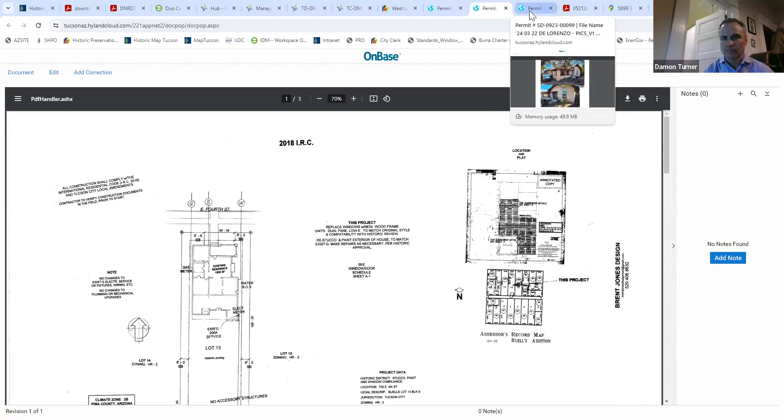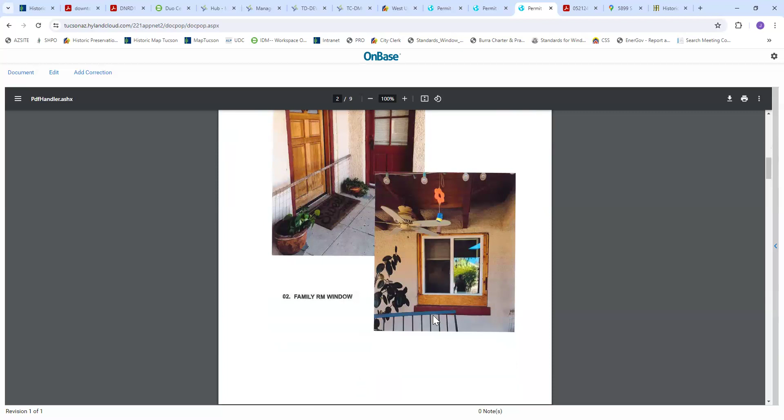Okay, very good. One of the first things I'd like to address is a question that came up regarding, so we're replacing all the windows on this historic residence with new units typical in keeping with modern windows. They have all the energy efficient benefits, the dual pane, pressurized gas, argon gas filled, everything like that. But in keeping with the historic requirements, we went with Pella Windows and Doors, they have a historic line. Now, they don't have specific window units that I could show you an example of, say the window for the kitchen or the window, because they all have to be custom built.

So there is a generic catalog listing for their historic window line, but nothing specific to this house. There wouldn't be anything like that until they make them, and they're not going to make them without a deposit. And the homeowner's not going to put a deposit to have windows made without the permit. So we're not going to have that, but what I can tell you about Pella's line...

It's wood exterior, unlike typical modern windows that are clad with aluminum or vinyl. They're wood windows, but exterior clad with aluminum or vinyl. Not so with the historic line. They are wood exterior, in keeping with what would have been there for the period.

A question that came up was whether the mullions, or muntins as they like to call them now, that separate the individual glass lights would actually be separating individual window glass, or whether they'd be only aesthetic. The answer, straight from Pella, is that they have a technology called ILT, Integral Light Technology. The window glass is not interrupted. This is in keeping with maximizing the energy efficiency for the units.

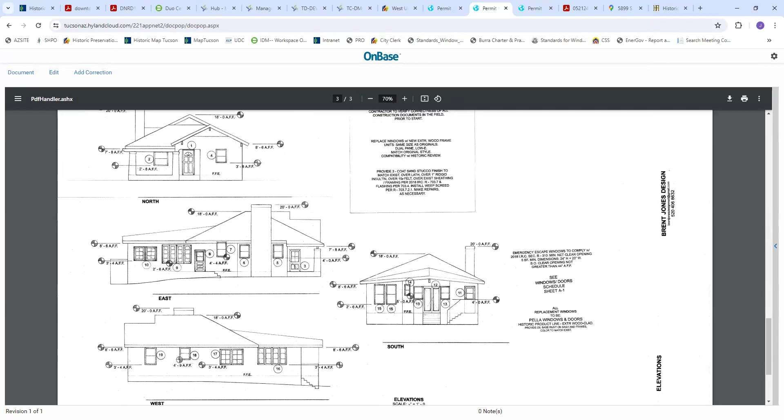Hey Jody, could you navigate to the elevation so we can see what he's talking about? I'm on the elevations, but hopefully you're not looking at a letter I'm typing. Huh, oh, nope, never mind. I had my participant panel up and it was hiding it. So I see them now. Thanks, never mind. Okay, I see what you're talking about now. Thank you, sorry, continue.

One thing I wanted to point out is when they put those mullions inside the glass, I believe it's called divided light panes, that's not what you want for the historic look. You want to mount it on the outside of the glass, so they will not be divided light panes. The aesthetic application of the mullions will be mounted on the outside so they can be painted.

They'll be painted with a paint that will match that brick red that's on the house now. It looks almost like a brick red to me, and that will be matched. You can see it on the trim on the roof, and if you look at the submittal photos, that red color is throughout the house. It's also on the pop-out sills. The house features these stucco pop-out sills under the windows, and they feature that brick red color.

One thing you can also see is on the entry door, in pictures, there are mullions. Those are in the same color as the unfinished wood on the door, but on the wall to the right of the entry door, there's a door that has the classic look I'd be describing. It's painted in that brick red, and the mullions separating the individual glass lights are painted in that brick red.

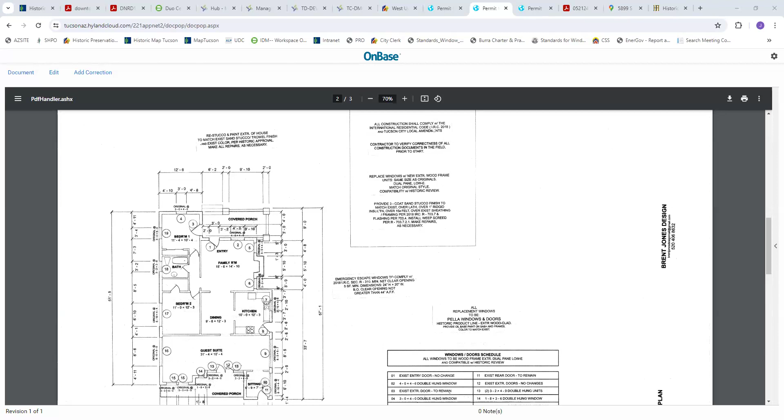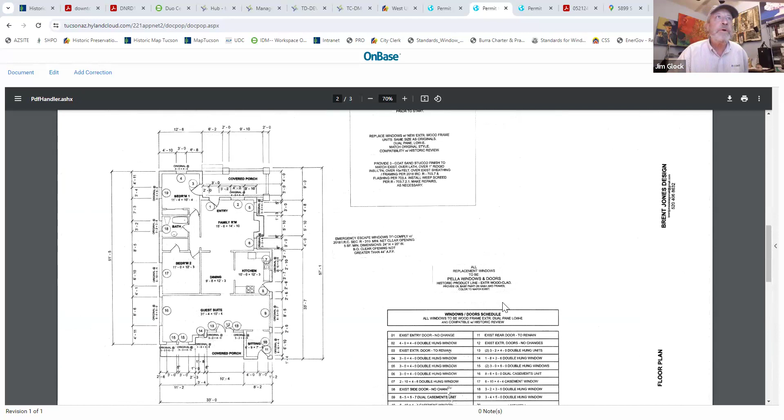Just one clarification before I open it up for questions. Brent, you noted that in the kitchen casement windows would be appropriate, yet the schedule shows double hung, and then the bedroom is where the casement window is. Is the bedroom turned into a kitchen? If you could flip back to the floor plan, please. Yep, I'm there. So 17 is the bedroom with the casement window in your schedule, and then 16 is the dual casement window that's in the guest suite.

So yes, I should probably clarify. I'm just asking you to clarify, I'm not saying that that's right or wrong. I just want to- and then in the kitchen it does still show a double hung, number 7. So I'll give you a chance to clarify casement versus double hung and their placement and the basis for that decision, please. Yep, you're right, I see that. Okay, so here is my explanation for that.

So for instance, number 17 is a very long window, you wouldn't do a double hung on a window like that. That's when I was thinking of bedrooms, I was thinking of from the front. I said it without actually looking, but what I had in mind when I said a typical window for the bedroom would have been, say, window number 4 or window number 19. Window number 4, you can see it on the front of the house, that's a typical double hung window. You wouldn't want to do a casement, wouldn't look right for that.

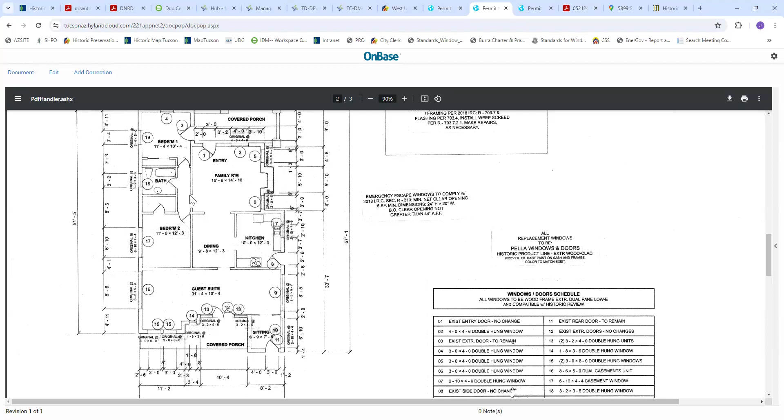But for instance, as you brought up, number 17, yes, you're right, that is a bedroom, and I didn't have that in mind when I said that. But yes, because that window is long, you wouldn't do a double hung on that. I mean it just wouldn't be period accurate, not only for historic, but it's pretty much unheard of. That naturally wants to be a casement unit.

When I said the kitchen, I was actually thinking of the long windows to the back of the house, windows 9 and 10. The kitchen window, it turns out, is a double hung, simply because of the size of it. Again, making that a casement would seem period incorrect. Windows that have that typical size, like number 7, number 4, number 19, from everything I see from neighboring houses and what seems period correct, those are double hung.

But these windows that are unusually long, like they're 8'5" or 6'10", these long windows, they tend to feature in rows that are lined up. And those, if they're going to be operable - not necessarily all the time on the original historic window would those be operable - but in order to satisfy modern codes with emergency egress necessities, you really want those to operate. But if they're going to be period correct, you want those to be casement style for those longish windows.

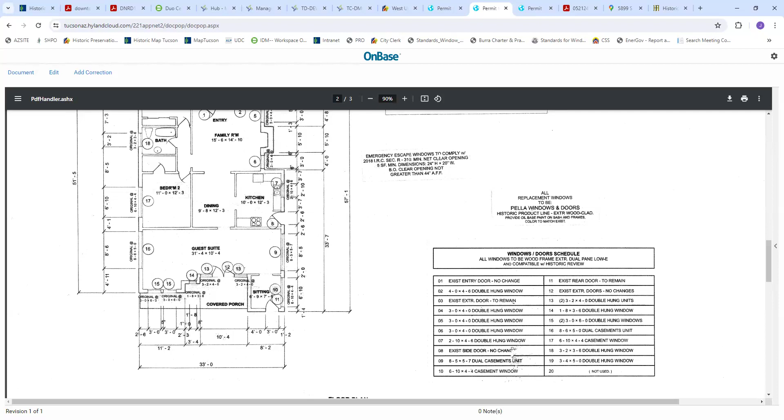So I did misspeak a little bit on the kitchen. Obviously you caught me on that one, and good catch, but yeah. I'm not trying to catch you, I'm just trying to be clarified here, and I'll let others perhaps catch another comment I have. But with that, I'm going to open it up to the remainder of the board to offer their insights, please.

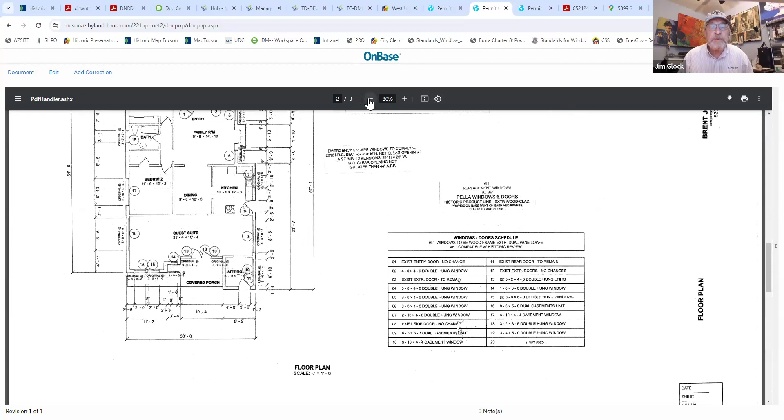Sorry, I got temporarily cut off for a second, but I did have a question actually unrelated to the windows. Can you guys hear me? Okay, yep. I saw a note in here about rigid insulation. Is that exterior or are you doing some interior insulation?

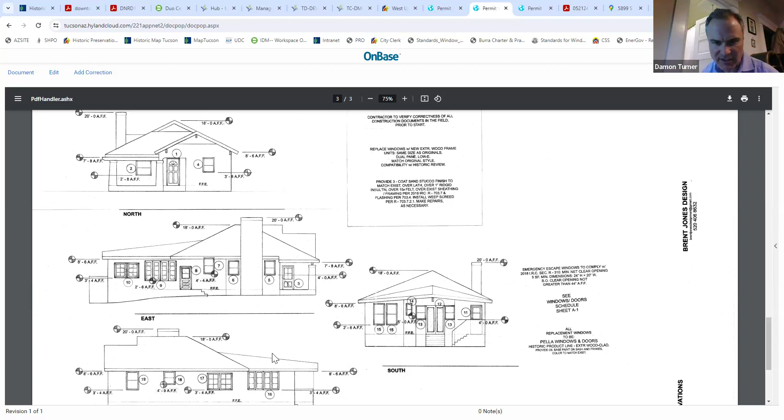Oh no, there would be no insulation work. Nothing is being done on the interior, and there shouldn't be anything having to do with insulation. Just to add to Damon's question, no insulation on top of what is going to be ultimately restuccoed. Yeah, it's on page A2, Brent, in the little box, and it says provide a 3-coat sand stucco finish to match existing, over lath over 1-inch rigid insulation over 15-pound felt over existing sheathing, etc. That's just a standard stucco detail. It's not really about adding insulation to the project.

Right, yeah, pardon me. I may have failed to bring that up, but I was thinking you were referring to insulation inside the house, like between the studs. But it's very typical when you're dealing with stucco over framing to put this 1 inch. Basically think of it as styrofoam, that's pretty much what it is. It's that styrofoam you get when you order things on Amazon, you open the box and it's got that white styrofoam. They make it in 1 inch thick sheets. You pretty much always put that under the stucco coat in order to give grab, if you will. In order to give grab for the stucco, they put what they call mesh over the foam, which is basically chicken wire.

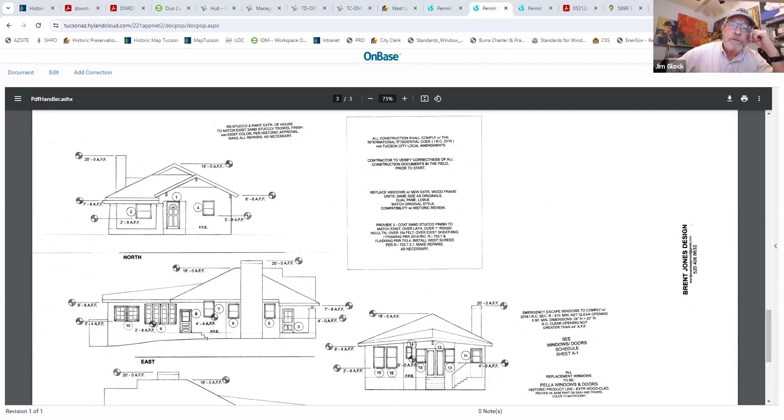Can I ask, I have questions of our architects on the board, please. I don't see anything, no, I have questions for you guys. You know, in these large casement window openings, I know in my home I have double pane windows, two double pane windows next to each other in areas where he's recommending casements. I just kind of want to ask what your opinion is of that, and are the casements really good? If the casements are good, I'm good, I just kind of wanted to double check that.

I think what I've seen more frequently than 4 casements like that would be 2 casements on the very edges and then a fixed picture window in the middle. I think that's a little bit more standard. There was, last time, a mix up with the photos of what was existing and what was not. There was actually a photo that, if I recall correctly, showed this configuration, but in reality those windows had been removed, which led to the confusion. Take those pictures - this kind of configuration here is not something I see too often, but usually it's something like this.

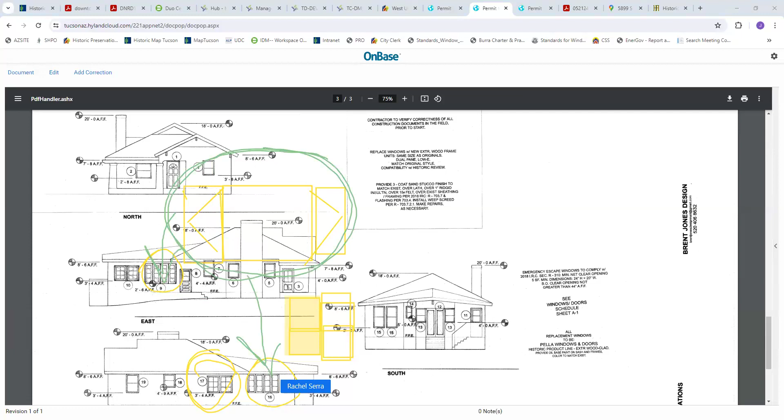And then a pair of double hungs together would go right here, based on those sizes. Does that make sense? Or does this just look like crazy scribbles for everybody?

Got it. I'm following you.

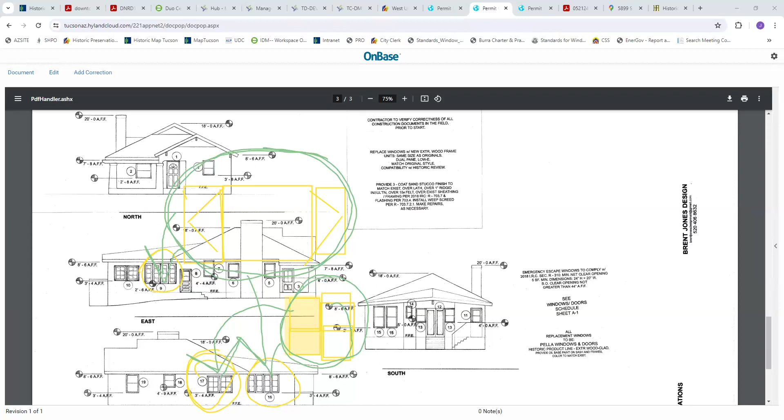So like, actually, hold on, let me erase all of this. So if you look at right here, this pair of double hungs right there on the side, something like that, I think is more likely what would have gone right here. What's happening right here.

And then I think these larger openings, this one and this one, would have been like, so if that's the whole opening, then it would have a casement and a casement. So it'd be something more like that. And then that centerpiece is fixed.

Interesting. Okay, thank you, Rachel.

So I don't know if we don't have photos of it. Do we really want to get into all of that changing? I don't have a strong opinion. I think the bigger question is, do you think what's being proposed is acceptable?

It seems a little busy. I think it would have been this configuration. So I guess I'll defer to you guys if it bothers you or not. I think it would be better to do sets of double hungs and a fixed window with flanking casements on those bigger openings. And they could still do the simulated divided lights like that.

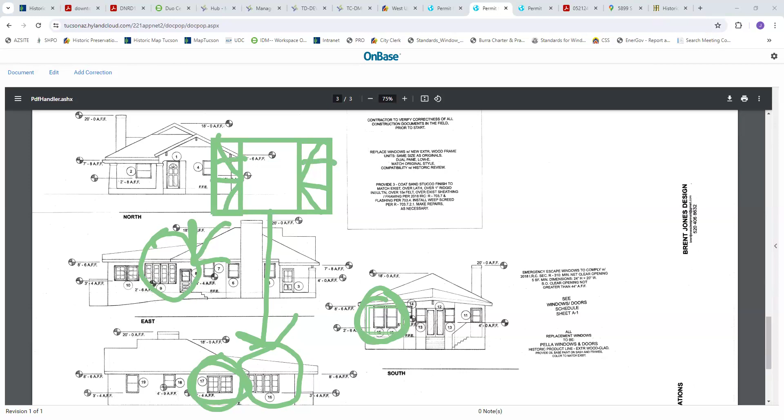Sarah, do you have any input for us? I've been following you, so the only thing I have to... Brent, I'm asking one of our board members, Sarah, if she has any input. Sorry. That's okay, Brent, thank you. No, I'll defer to the architects on the group.

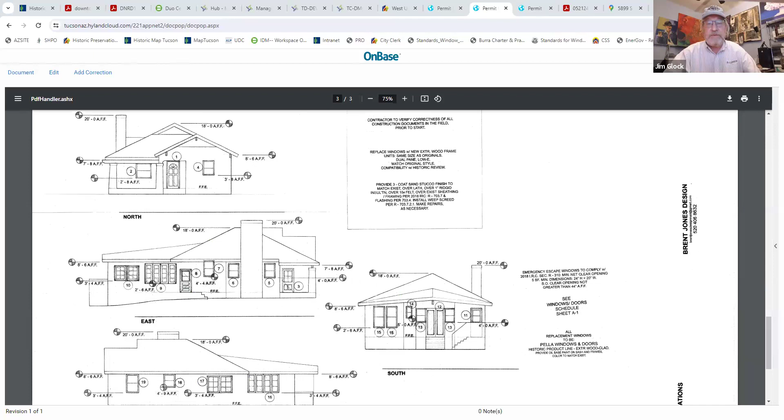Okay, thank you. So back to you, Brent, if you want to make any comments. Otherwise, I'm going to see if I can get someone to move some direction for you here to keep things moving a little bit. But Brent, you want to say anything?

Okay, so a couple of things. I've been following you. Now, the one thing I would point out is on Windows 9 and 16, I have those as dual casements. So you have two sets of casements mounted within the same frame.

Now, which windows would you have suggested might look better or good? So I'm trying to highlight. Can you see where I added the green circles on your 9 and 16? Do you see the green circles on 9 and 16 on the elevation? They're very faint. I can see them though.

Oh, Brent can see. Oh, sorry. I don't have visual, but I'm following.

Okay, yes. So essentially what I'm saying, Brent, is when you look at Windows 9 and 16, picture your 4 sets of casements. So if the center 2 of that set became a fixed window with a single casement flanking on the exterior of those 2 - so it'd be a skinny casement by itself, not like French door casements, but a single casement - and then a fixed window that's two casements wide, and then another single casement. That's a pretty standard window arrangement for this time period.

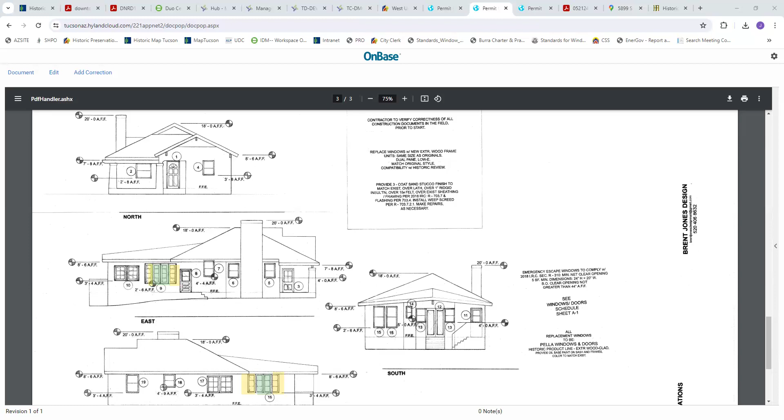Hey. Wow, well thank you, Brent. That was a great presentation. Thank you, board members, for your insight.

Let me dream up a motion for someone else to make. That we accept the window schedule as proposed with the following exceptions. And that is for Windows 9 and 16, that they be casement windows on either side with a single window between them.

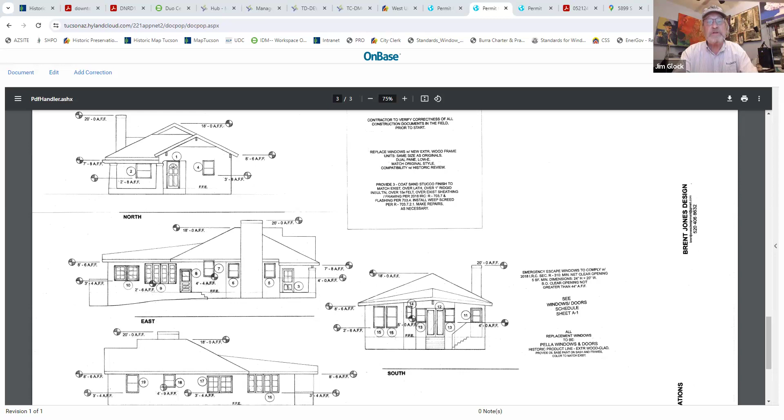And then in the casement windows, the simulated light mullions—is that what we want to call them—are acceptable grills, as they're painted. Yeah, the simulated grills. What are they also called? I'm trying to take notes here. Simulated? Well, they're simulated divided lights. Divided lights, thank you. That's called, yeah, divided lights.

And then also Windows 10 and 17 would be pairs of double hung with a mullion between them, correct? Yes. Okay, I'm sorry, did you need me for something? Oh, no, you just made a noise. I thought you had something to say. I do, but it's your party, so.

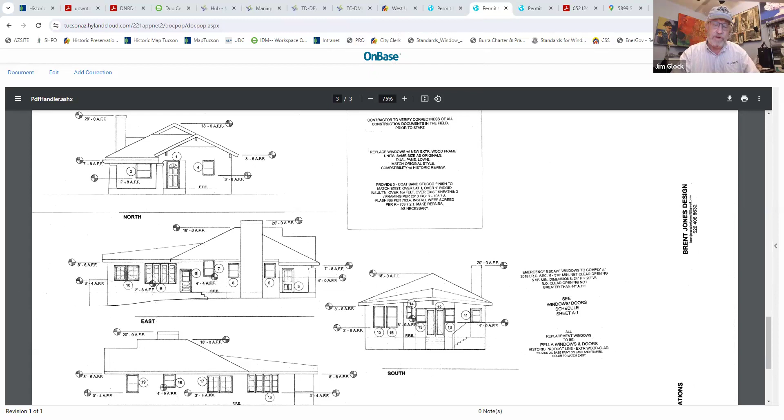Okay, all right. So for the purposes of asking for a motion to be made, one that I've crafted by everyone's comments—and again I can't make a motion as your chair—is to accept the window schedule as proposed with the exception of Windows 9 and 16, having a single window in the center with casement windows on either side, and the simulated divided lights included there. And Windows 10 and 17 be double hung with mullion, and again, the simulated divided panes as shown in the drawings.

How'd I do? That was great. Okay, so does anyone want to move that? I move that. Okay, Damon moves. Is Rachel... Sarah, I second? Rachel seconds. Any further comments? Staff?

Okay, with that I'll do a roll call. Sarah? Aye. All right, myself, aye. Rachel, aye, and Damon, aye. All right, very good. Hey, we covered an item.

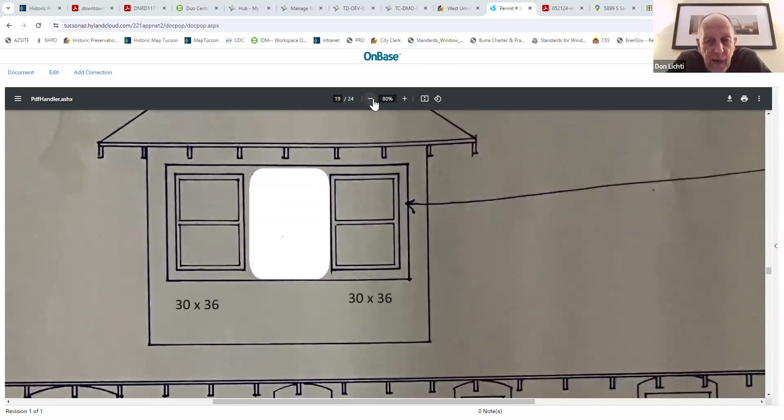The second issue was related to the third—I also have, if you keep going Jody, that's the side window. Go one more. Okay, I also have the elevations. Let me explain this.

There are dormers on the 3rd floor. The information I had last time is that in the mid-'80s, there was some renovation done on the 3rd floor, and there are some steel casement windows on one dormer. I was asked to go back to the Arizona Historical Society and try to find original architectural plans from 1915. I went to them and worked with them a couple times, and found out they do not have any original plans that go all the way back to 1915.

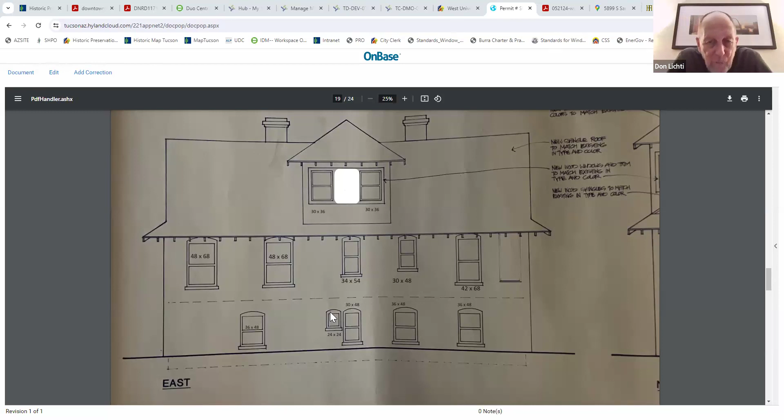However, with some further looking, we were able to find plans for the renovation that was done in 1992. So originally we thought that was in the 80s, but it was in 1992. This particular elevation, and there's one of each side of the house, shows the windows that were planned—well, the windows were there already, but it shows the changes on the third floor in 1992.

And they have some interesting comments there on the plans. One comment said existing screened openings to remain—I have no idea for sure what that meant. The other comment said there will be a new dormer with custom fixed window. So they obviously built a dormer out in '92 and put in these custom windows, and the custom windows are steel casement windows.

What our preference is, I guess what I'm saying, is that we do not believe the windows built in 1992 had really any historical significance. It just happens to be what they put in. Our preference would be, instead of putting steel casement windows in there with these grids or mullions in them, to put double hung windows there also, so it would match the rest of the house.

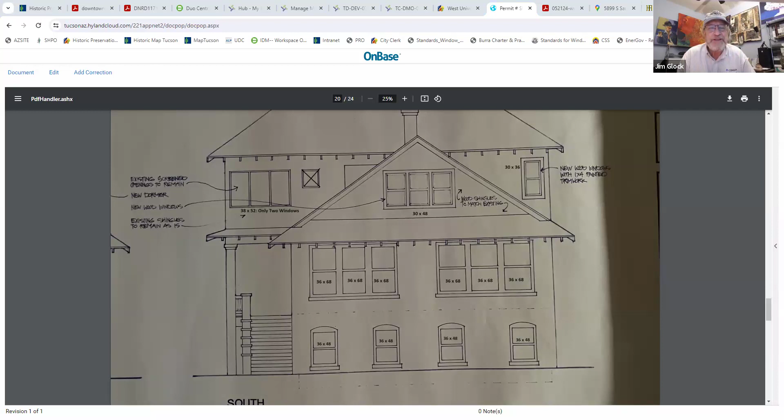Okay, thank you, Don. I was your neighbor to the south in '92, and I saw this remodeling occur in 1992. I believe Corky Poster was involved with its design. I just want to note, you probably did not receive the minutes from our last meeting, but we did discuss this a little bit, and if I might read the discussion that occurred then for the benefit of the board members present.

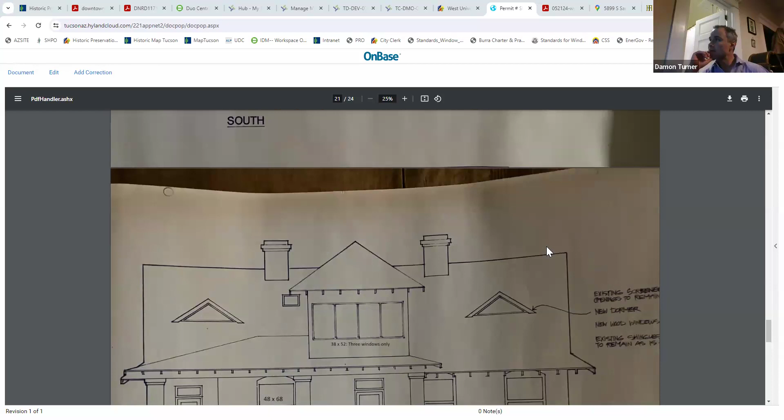Our discussion did involve appropriate windows for replacing the third floor steel casement windows. The proposal was to use single hung or double hung as a replacement. The board was not comfortable with this approach unless there is evidence that single or double hung was original to the property. If the casement windows were added later as part of an addition or renovation, then it's desirable to keep that newer work visually distinct from the original home by staying with casement windows, not having them match the rest of the windows in the home. That's the discussion that occurred at the last meeting.

I'm going to let the board ruminate on that and then offer their observations with respect to your proposal. So with that, I'm going to be quiet and ask for the board's input, and offer mine maybe at the end.

I think what you're doing there is just a fantastic renovation. Again, we want to hopefully get this to the next step for you so you can finish it up.

With that, if I could make just one more comment, I guess I was not aware that it was recommended that we would stay with that particular style of window. If it is, we can do that. I use the word desirable, I didn't say recommended. So I'm open if it's absolutely necessary.

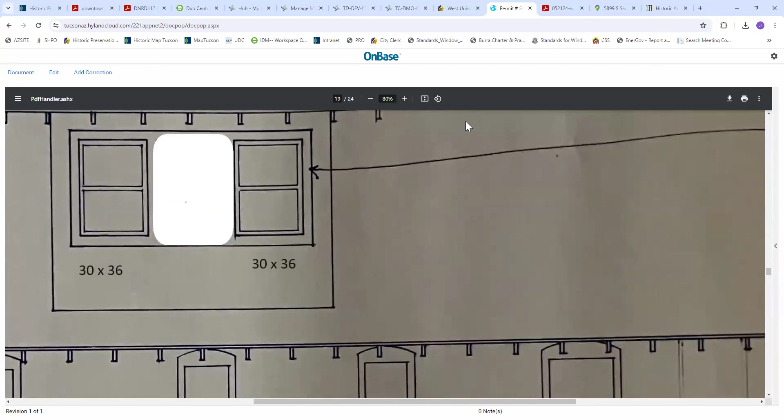I have a question. Jody, are you navigating the screen? Yes, I am. Could you, there was, one of the elevations had like a big white square on it. What's that about? I'll explain. So one, right there, you don't like that, huh? It was just a little weird. Yeah, it is a little weird.

Okay, so this again is a picture of the 1992 plans. What we had in the 1992 plans, this is to the east, they had 3 windows there, and there are only 2. So we just blanked out that one window. Got it. Okay, so your intention to go forward is to have 2, not 3. Right, we would want that exact location. We would replace exactly what is there. So whoever built the dormers out actually did not follow the plans exactly.

Shocking. I can't believe that happened. Sorry.

I tend to agree with the comment that was decided on last time, that if these were a different style and material, I'm okay with them matching the new material because we're replacing all of the windows, but I think it would be nice for them to stay as casements or double hung as they were built. I don't think it's totally necessary either, as this is not historically significant, but I think it's better to acknowledge that this portion was not original, and so it should have something that makes it stand out as being not original.

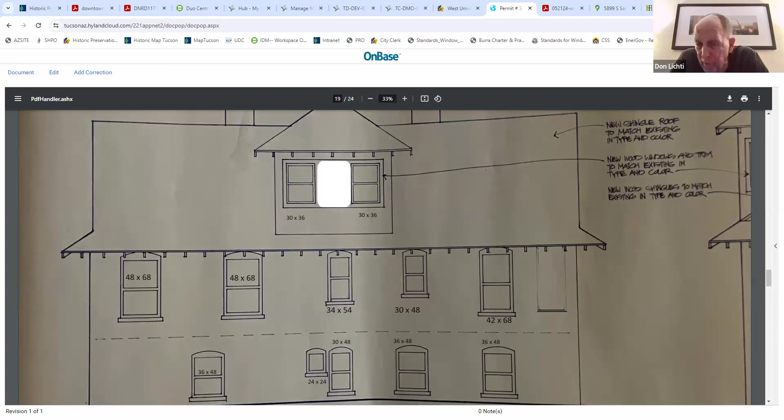I guess so. That sounds like there must be another step where I have to submit other plans or something, which I'm not aware of. Well, are the plans you submitted last time, are you saying those are still your plans? Yeah, I mean, the plans I submitted last time, I guess are maybe what I would say we're submitting. This is just an explanation of what was there in the '92 plans that just showed it's essentially the same window replacements. We put the sizes on all the windows, and it describes a little bit more of those dormers coming out.

Okay, I'm just going back to your old plans because I don't remember them well enough to know what's really being proposed here. So these are the plan views that you're seeing. The architectural plan views are identical to what we saw last month.

What's changed is that he's changed from a plastic window insert to an aluminum clad window insert, double hung insert, based on our recommendations at the time. So there's really no appearance change with respect to all the windows, with the exception of the casement windows on the west elevation on the top floor that were, prior to 1992, screened in, and now they were put in as metal casement, and he'd like to replace the metal casement with something more energy efficient.

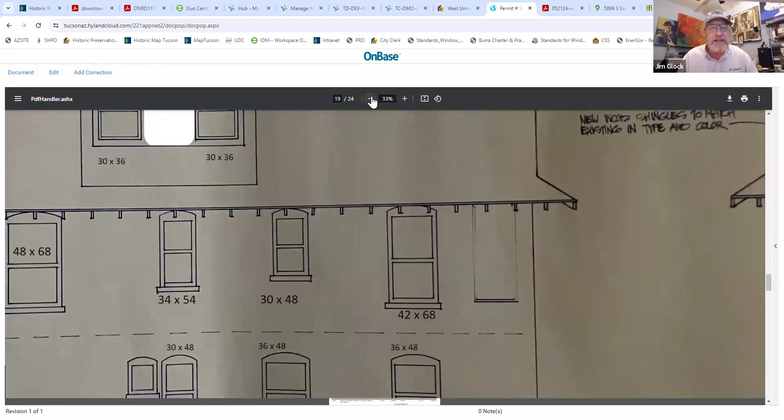He had proposed double hung wood, and Rachel suggested that they be casement wood clad, that they be architecturally different than the rest of the others. Let's say there's 6 windows instead of the 42 windows he's replacing as double hung. He would replace 36 of the windows double hung, and then the ones on that west facing top floor area, story space...

Rachel's suggesting utilizing a window other than double hung, just to show that it was architecturally different historically. In fact, it was probably a summer sleeping porch or something like that way back when, if that was the case. So really, we're just talking windows, and he's not changing anything materially other than the type of window framing that's going in there, if I'm correct. So Jody or Don, if I mischaracterized what you presented, please correct me.

No, I think that's correct. Again, in that dormer coming out there, what you're seeing here are the windows that are facing west, and on each side there are 2 windows, so there's about 6 windows there, and I guess we can make them match more what currently is there. I mean, I know we can do that if that's what's preferred.

Yeah, I think it would be appropriate for them to not look like they were original, as that was an addition in '92, that it all look like it's from a separate time, and they can be the same material, you know, you can still use your Pella window. I think just having them all be double hung starts to try to make that addition from '92 look like it was original.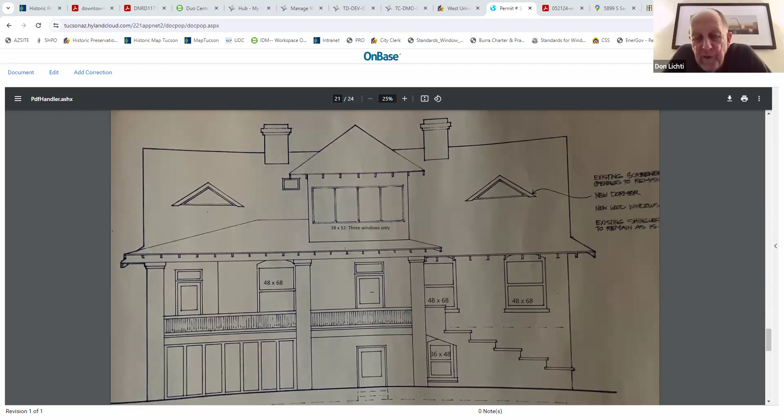Would it be easier to say all windows on the 1992 addition, rather than describing each elevation? The only clarification is that on the third floor, all those windows were replaced in 1992, but the ones on the north, south, and east are regular double hung windows. The only ones like this are on the dormer coming out on the south.

So I believe what you're saying is that for that dormer, those windows should be handled differently - not only the four here, but also the ones on the two sides of the dormer. So just that dormer would keep this style. I'll describe it as the dormer on the third floor, those windows.

So the motion would be that all windows, with the exception of the third floor dormer, be replaced with the proposed Pella aluminum clad wood double hung windows. And the dormer windows on the third floor would be replaced with a similar Pella wood clad casement window that can or cannot open.

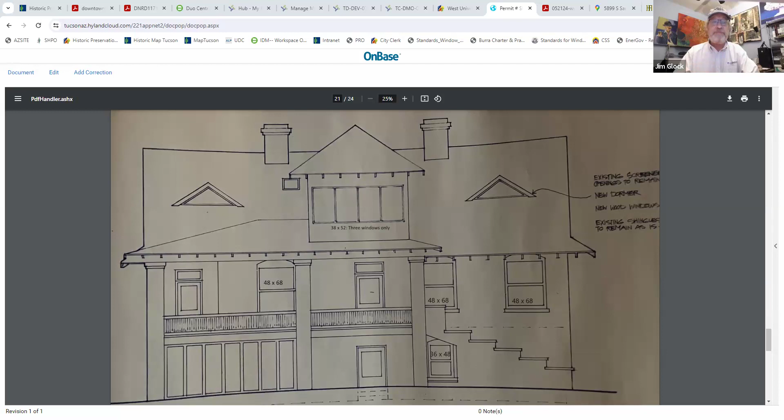Is that all we need? Okay, this is Rachel. I move that - the motion Jim stated. Do we have a second?

Damon seconds. I'm going to do a roll call. Sarah, yes. Aaron, yes. Me, yes. Damon, yes. Rachel, yes. So it passes unanimously.

Very good work, Don. We look forward to seeing those windows coming in. Good luck with your next step with the historic review. Jody will shepherd you through that. I look forward to seeing the work done. I hope to see you in the alley. Thanks very much, thanks everyone, appreciate it.

Thanks everyone for that. Moving on then to item 4, reviews. Case number SD-0324-00025, 941 North 4th Avenue.

I'll just very quickly introduce this. My name is Donnie Russell, I'm the project manager with the City of Tucson Parks and Recreation Department. As part of our Prop 407 bond issue, we promised to renovate the restroom at Catalina Park. So here we are getting ready to renovate it. I'm now going to turn this over to Matt Smith from Arc Studios and Tim Smith from Swaim and Associates - no relation, I don't believe. And I'm going to zip it up so I don't say anything wrong.

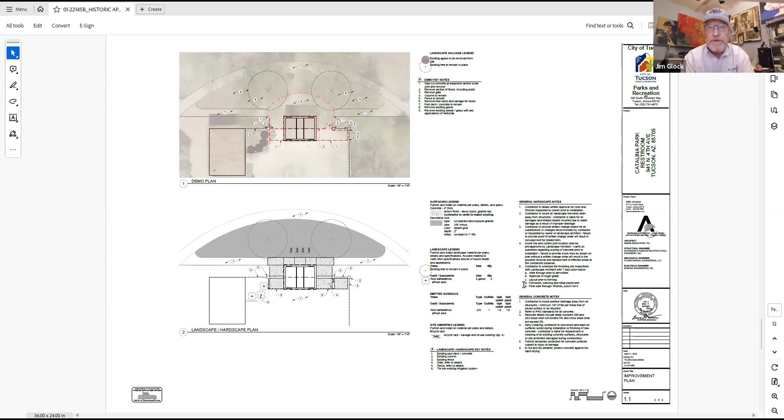Right, thank you, Matt. Before I open it up to the board, I've got 3 quick questions. I believe all the pink concrete that you're proposing to remove and replace was installed with the splash pad installation, and so it was not the historically placed concrete.

This is a gee whiz question. Did the southern doors that entered into the splash pad area enter into separate bathrooms, or were there 4 bathrooms there at once? There are 4 bathrooms currently. The north and south doors are service doors, just storage rooms.

This is something for the board to ponder. Parks and Rec has had a heck of a time designing and managing bathrooms. This one, when open, is no less challenging than others. My understanding is that doors with louvers, or the ability for the top or bottom 6 inches to allow people to hear what may be going on in case something nefarious is happening, is appropriate. I'm wondering whether our desire to maintain as much historic presence as possible would apply to doors that might need more modern safe-by-design standards for community bathrooms.

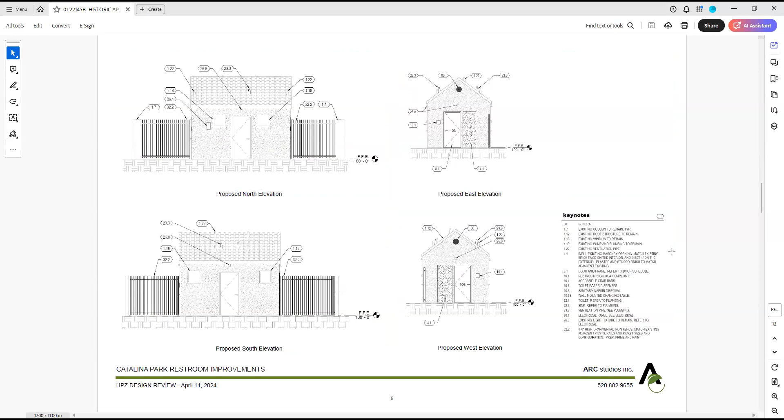So Matt, if you switch to the elevations, I think you can see where that—right, so the darker colored hatch pattern is where that infill would be, and then it's set back in an inch or recessed.

May I ask a couple questions? I'm not sure I'm 100% tracking. So I'm familiar with the 2 restrooms, but you're saying there's actually 4 and the 2 south ones are unused?

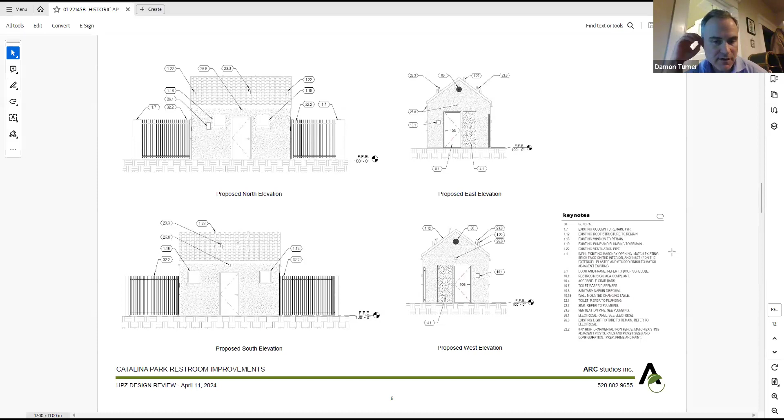Correct. Yeah, Matt, if you could switch to the demo plan—the architectural demo plan. I can try to pull it up now. So here's an idea to blow your budget with.

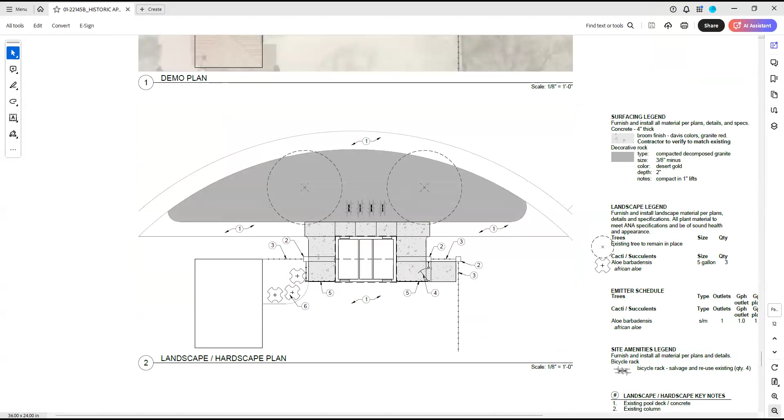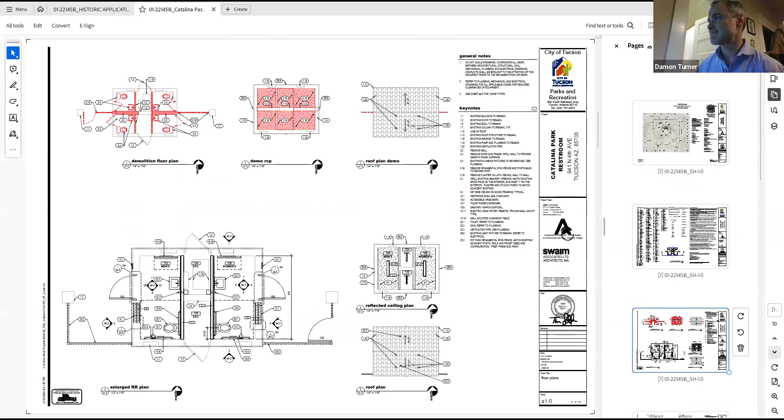Why not have the north and south doors that are the right width be your new bathroom entrance doors, and then leave the doors, the east and west facing little doors, in place, and move the fence into the splash pad area and move all the mechanical around in the bathroom to not change the exterior appearance of the building.

Yeah, well, hopefully the plans will help answer that. So you can kind of see how, with the 4 individual little restrooms, and you can see where the fence was coming in, and how you had a pair that was inside the pool area and a pair that was outside.

And then the central area is all service area. So the north half has all of the booster pump and electrical for the irrigation system in there, and the south half is maintenance equipment.

So is the intention then to just have 2 bathrooms, not 4, after this is all done? Correct. So pan down, please, Matt.

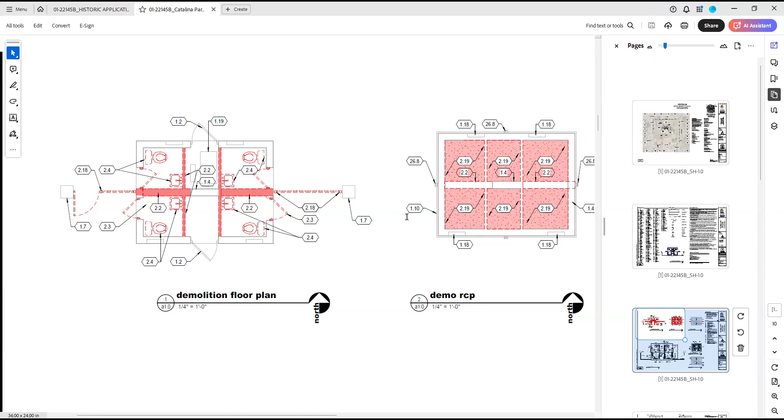There we go. Yeah, so it's larger than necessary for accessibility, but you know, that was really the only clean way to divide it up.

So then that central space remains storage and service and booster pump. And then the door gets wider, and we retain that pair of doors.

So the plumbing for that booster pump and everything, Matt straightened me out, but I think that's all coming in from the north side underground. Correct.

So we're trying really hard not to relocate that from a cost standpoint. Yeah, well, that's what I was saying, if money were no object. But well, and the other issue we would have, unfortunately, with using the north and south doors that way would also be security and public safety.

Where you're going to have an area in between the two restrooms that's closed off that you can't see. So I was thinking that you'd reconstruct the entire interior entirely to have them have appropriate restrooms set up.

And Rachel showed me once how to sketch on top of these things, and I haven't learned how to do it. So you're getting off easy. But may I ask?

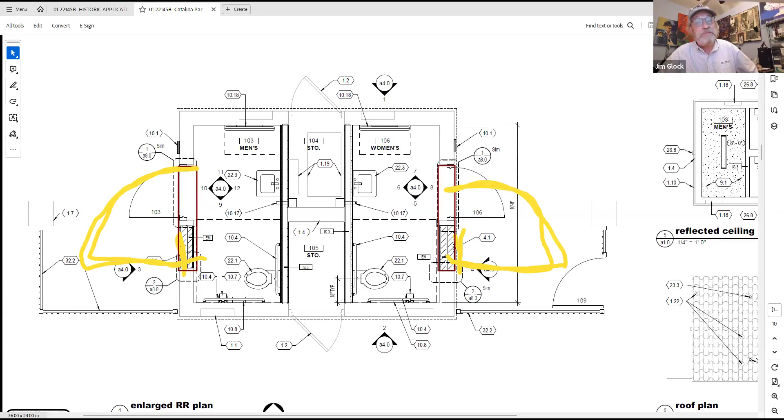We'd just have a door as wide as the outside, two doors and then kind of a little box. I was thinking about that too, but that seems crazy. Like I just drew right here - instead you'd have a super wide door. People would certainly be able to get in and out, and you wouldn't need 6 inches on the bottom, you'd only need 4 to get a volume of air in there or whatever. I don't know, just brainstorming.

I've figured out what Rachel did before, so now I'm dangerous. I better watch it.

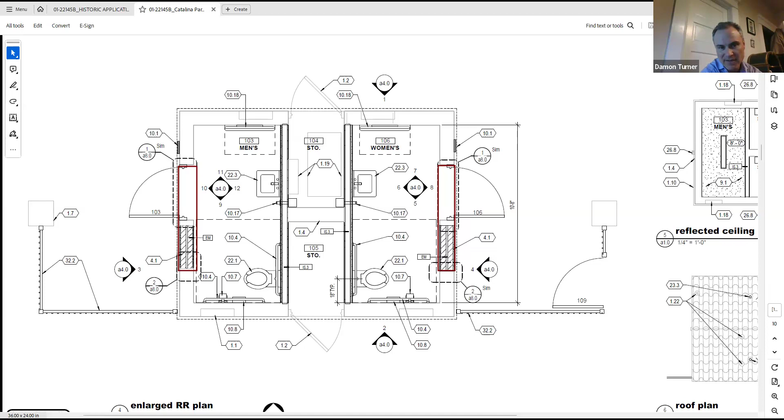I'd like to further understand - I think you answered my question on the door. Can you continue your narrative on why go from 4 to 2? Is there something about the interior space, once the door is larger, that the whole space has to be larger?

The toilet needs a 5 foot by 5 foot clear area around it - that's the dashed line in there - and then a turning circle is a 5 foot diameter turning circle. So could we, just throwing it out there, keep one side intact as is, and then have one ADA bathroom on the other side? So that we're only affecting one side, and historically you could go see what the other side looked like?

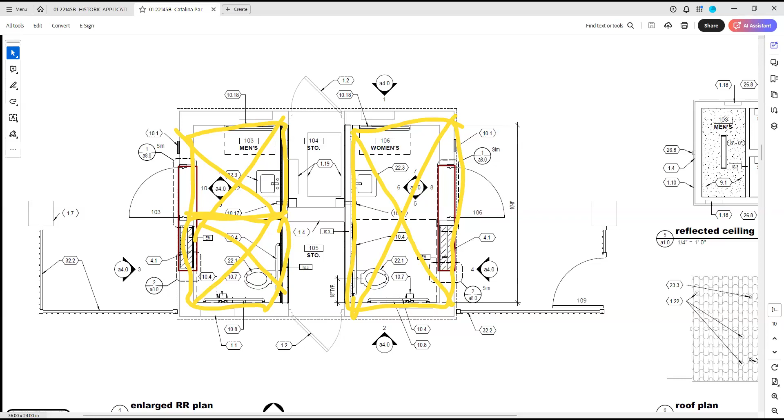That can come back to a Parks and Rec question. The tendency with parks, and it has kind of bounced around, is to have separate men's and women's restrooms, primarily because women's restrooms don't get as beat up as men's do. So having them separate allows at least half of them to not get quite so destroyed, which is nice. That's why we end up with both having to be accessible. If we called one of them unisex, the other could remain inaccessible - that's actually what we're doing at Fort Lowell Park, where we have an accessible restroom that we're adapting in, and leaving 2 of them non-accessible.

Those doors are 2'6", these doors are only 2 foot, so I don't even know that meets code. Isn't it like 30 inches minimum now? So you'd still have - yes, it's kind of like a clear floor requirement. It's kind of ambiguous, isn't it?

Just curious - I think the little 2 foot doors are kind of cool, so it's sad to lose them. I think the panel idea is an option. From a cost standpoint, I don't think it matters, it could go either way. From our standpoint as Parks and Rec, if we could leave those 2 foot wide doors in there and just infill them behind, make those 2 foot doors inoperable - if that's something you'd like to see, I don't see that being an issue at all.

We'd just have to figure out some way to sign them so people aren't like in the School for the Gifted cartoon. Well, if we remove the actual handle, the doorknob, so that it's a flush panel, that would help.

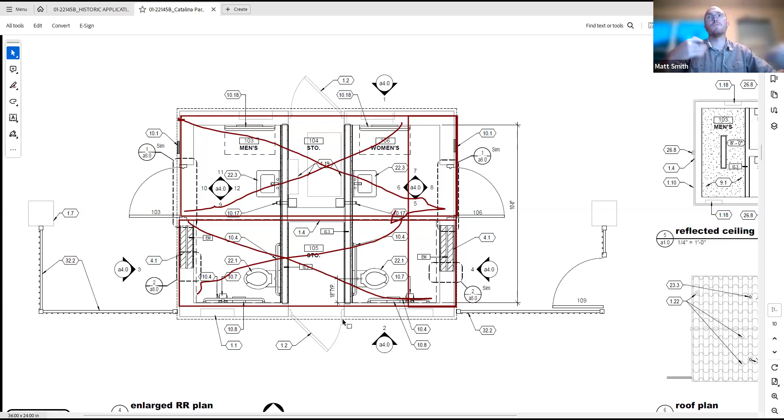It would be an option, but accessing the bathrooms from the south, the wading pool is currently all enclosed. So we'd have to alter the fence to separate off the wading pool, so there's no safety issues with that. There would be more fencing, more disturbance, more concrete removal, more expense. And then we would have to move the booster pump and the irrigation controller. All those have fixed conduit currently going to the middle. It's not impossible, but it gets logistically challenging, tracing wires and plumbing back to move the booster pump and controller. So logistically, it just becomes more complicated.

And why couldn't you just have two doors on each the east and west side, making both existing entrance doors larger, and entering into two stalls each with a toilet? So if we were to try to retain four toilets and move the lavs outside, you would be able to make one of those toilets accessible, and the other would be a non-accessible, smaller stall. But the way the doors line up, the doors would end up being more offset. The one for the smaller stall would be further offset, just to get the turning circle as well as the toilet clearance in there.

Yeah, so there'd still be modifications to the existing doors, and then the lavs on the outside. So from a historical perspective, I think that would be more objectionable.

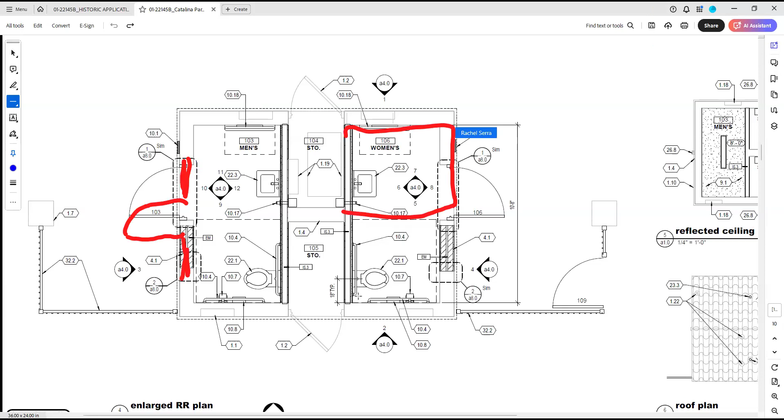Right, so you're saying something like this, stucco, and then this stays as is.

Then, to your point about vandalism, you could do 1 men's, 1 women's, and 1 unisex, and retain the 2-foot doors on the east stall, keeping the 2-foot doors there. Just don't touch that half of the building.

I'm sorry that we're redesigning the project for you.

Yeah, really. Maybe we see if we can erect a totally separate bathroom structure instead. I mean, they obviously put in the structure for the splash pad to accommodate all the pumping equipment. Why can't we erect a separate bathroom structure and keep this?

It's going to come down to budget. We only have a set amount for the bond, and that limits us. We're burning your budget up with our commentary, and I think you might be able to find a prefab bathroom to just pop in there. Well, we'd just cut their budget in half because we said don't touch half of it. I don't think the voters would allow us to ignore the bond. We already voted on it.

We went through this with Onza as well, where we explored a prefab, and actually doing the stick built was cheaper than prefab. So there are some surprises in the cost right now.

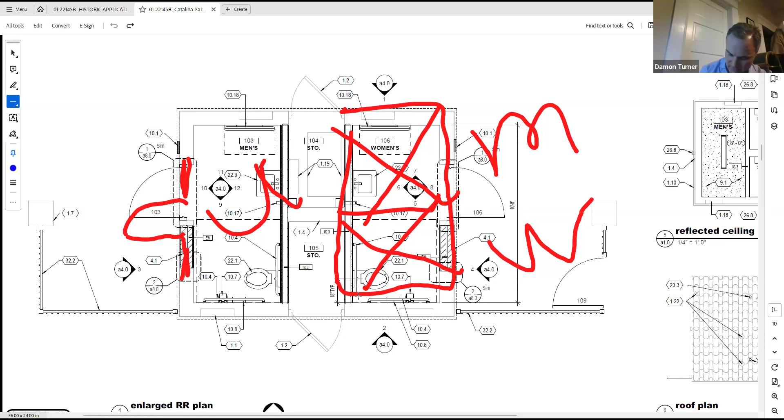It does not. Yeah, I would think Historic might actually be able to help waive keeping the two tiny doors. Or you might have to appeal to the building official and say that this was Historic's request. Can we keep doors that don't meet standard code right now, essentially?

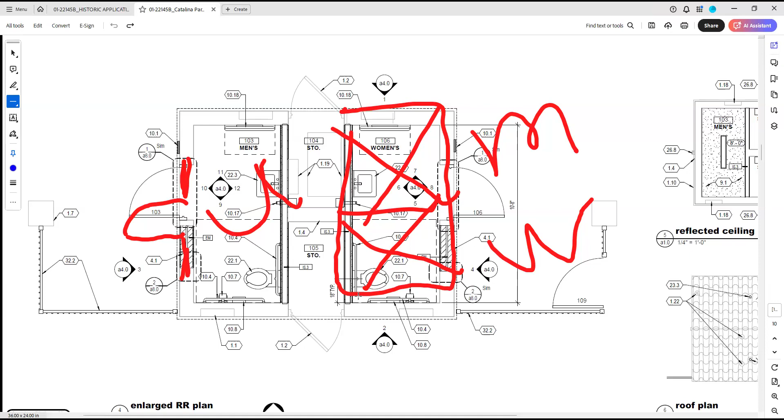Quite frankly, wearing another cap, being the treasurer of the West University Neighborhood Association, we're prepared to pursue other funding sources to augment this project if we're able to get the best arrangement for the park and the bathrooms from the standpoint of the neighborhood overall. So again, I kind of throw it back to Donnie, and I think as chair, given the time we've spent on this, you guys have done great work and really tried to accommodate us. I think I want to continue this.

I think I'll work with staff to have the minutes reflect all the ideas we came up with. The little small door appearances, the appearance of this structure, are meaningful to us and are driving a lot of our commentary. As Historic Review Board, the internal function of the building isn't necessarily our purview, but at the same time, as neighbors and folks with an interest in design, we want it to work the best overall.

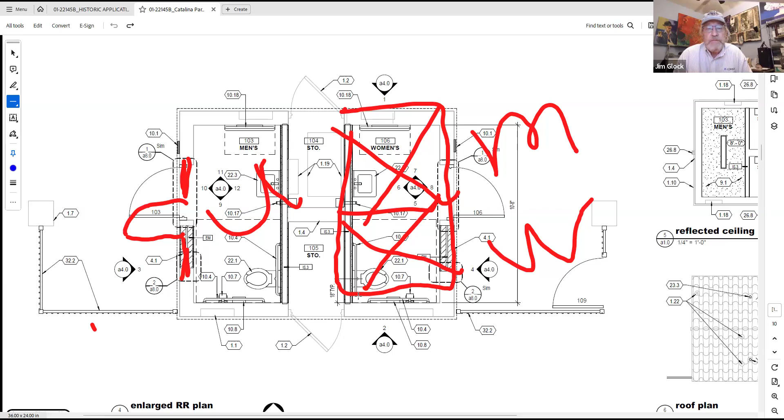So I don't know, I'll leave it to the members of the board to recommend how we proceed. I motion for a continuance. Okay, we have a motion to continue. Hearing no second, is there an alternative motion?

I'll second. This is Rachel. Okay, we have a second to continue the item to next month. Staff, architects, thank you, I think you've done a great job. With respect to that, any further discussion on the continuance of the item?

Will the continuance come with different recommendations or requests? It'll come with a reflection of the commentary made tonight. You'll have to bear with me as I scour the recording to summarize that, and hope all of you took copious notes and can correct my interpretation of our commentary.

I'll do my best, but I guess that's why I'm a little unclear on the continuance, because we're either asking them to come back with a new design of the 3 stalls, or to get funding from elsewhere. The continuance is really vague to me, which is why I didn't really want to second it.

I see. Okay, sorry, this is Sarah. I'm sorry, there's got to be a reason for a continuance. You can't just say we have to continue it because we're going to argue about what a door looks like, or where the plumbing is, or require them to move plumbing which isn't in their budget. I don't mean to be rude, but this is getting to be ridiculous.

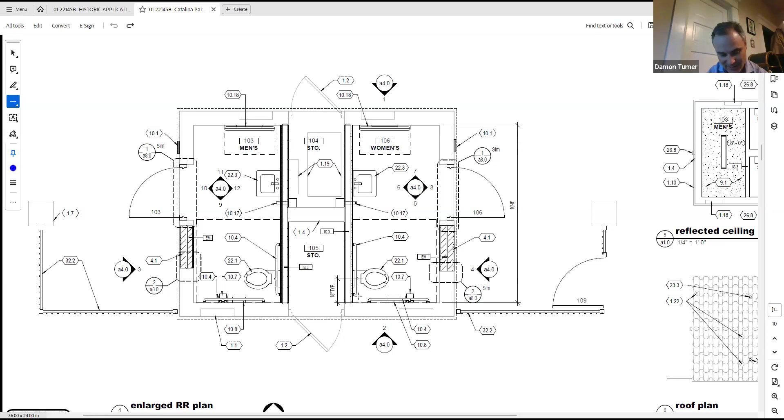So in essence, you're modifying your previous motion, to be a 3-stall design, is that what you're asking for? Yes, a 3-stall design or a 4-stall design, or something that conserves all of the interests we've talked about - the historic character of the building and the tiny doors that everybody seems to love so much, and the other concerns that were expressed regarding usability of the bathroom for the neighborhood.

Damon, you were the motion maker, correct? I was, yeah. So Rachel, you were the seconder, do you agree to the revisions? I agree to a 3, if we'd like to see a single ADA stall on one side with the door centered and the 2 stalls on the other side, maintaining the smaller doors.

I don't think it's our job to tell them how to design it, which is why I'm specifically not saying that. We're telling them what we care about. Understood, but you need to give clear direction about why you're continuing it and what you want them to come back with, because you could come back with a whole mess of not what you want. Yeah, because usually the continuance is like, oh, we don't have enough information on these windows, show us more information.

And so we want to have 3 stalls that maintain the design aspects we've talked about. I think what we want is to make an effort at maintaining the historic character of the building. I'm not presupposing a design solution that does that. And my recommendation or my motion was a continuance to allow them to come up with a new design that does that.

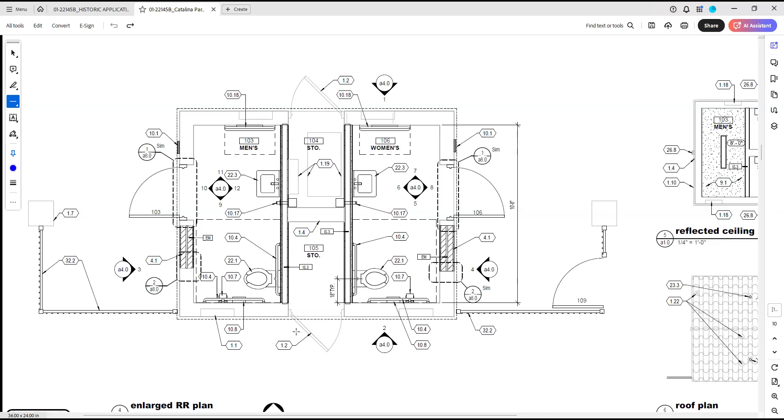Sorry, Rachel, Sarah? Yes. All right, I'm gonna say yes just to move this off the dime. So the motion's approved as submitted.

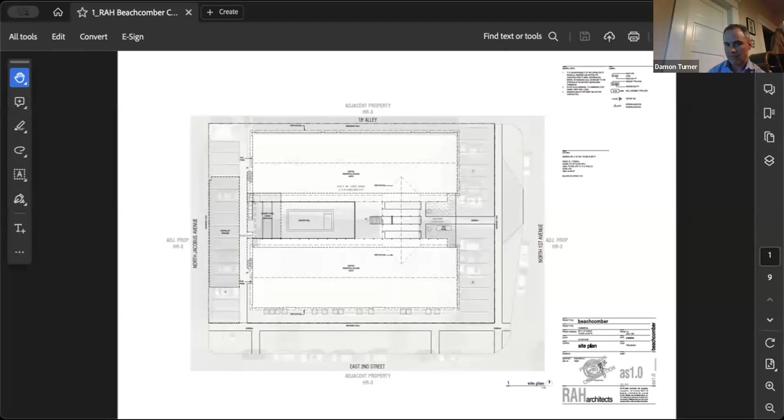Jody, I can go ahead and share my screen. Can you all see my screen? Yes. Perfect. Okay, I'll try to keep this relatively short.

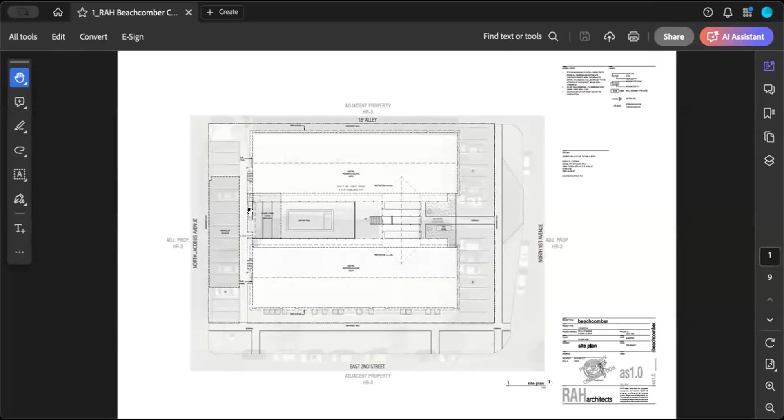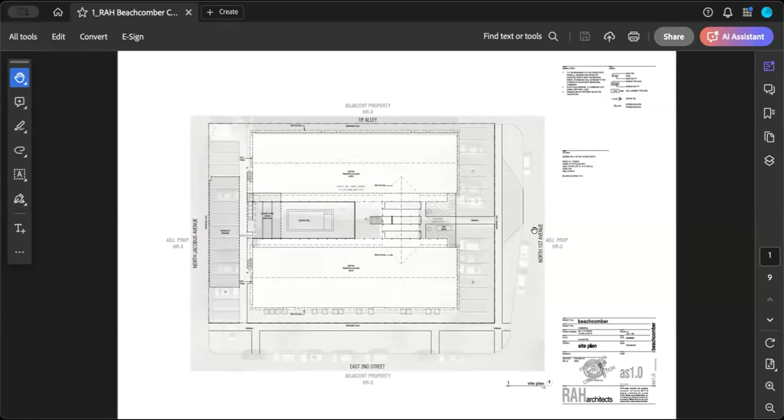This is the Beachcomber student apartment complex over on 2nd and 1st Avenue. There is an existing laundry facility at the west end of the project facing Jacobus, and the ownership wants to update that laundry facility as well as the interior courtyard facing the pool. But I believe my primary goal tonight is to receive feedback about the exterior treatment we plan to apply to this area facing Jacobus within the West University neighborhood.

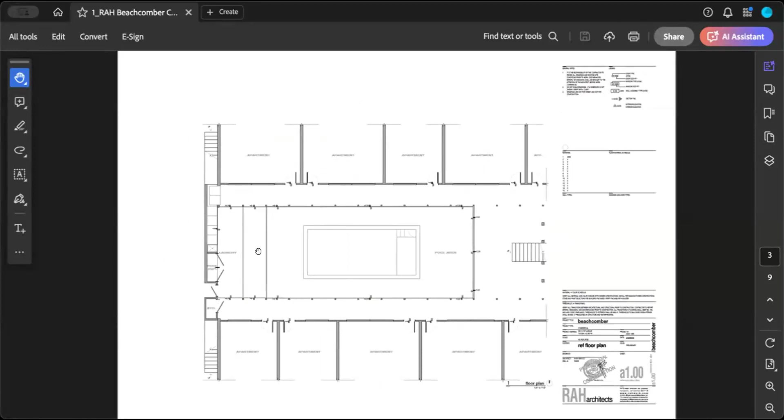This is an existing plan, very limited, but it is still there. A laundry facility with a couple of laundry units, basically covered by a shed structure. It is open air, with a rear entry point, and stairs flanking it.

This is the elevation in question as it currently exists—the rear elevation facing Jacobus. There are stairs accessing the upper balcony, electrical meters, and this entry point. This entire finish, which I'll show later in a series of photographs, is a T111 siding material that was laid up at some point.

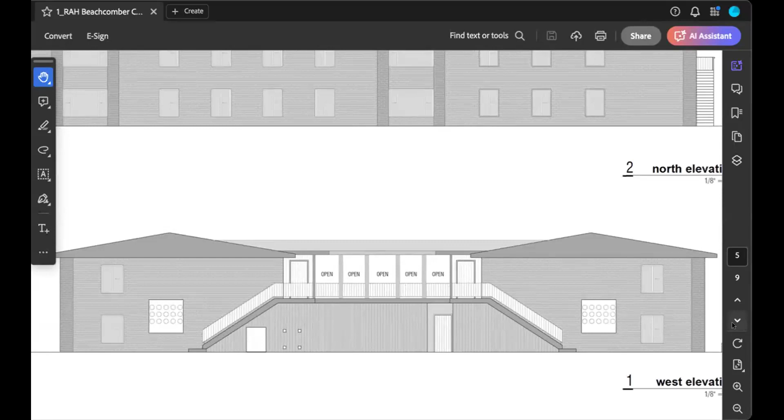Just for context, this is—and again, we are in a very schematic phase right now, just sketch renderings—but this is essentially what we're proposing to do. And I'll zoom in here a little bit.

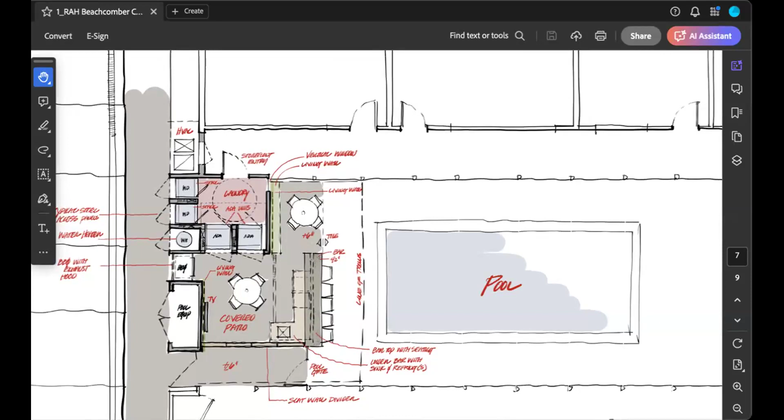So there's a little bit of complexity when you're trying to place commercial laundry units into a tight facility. You have to provide ample access for technicians to get to that equipment from behind so they can service it at any given point. With the very limited footprint that we have, we've come up with the idea that there's going to be a series of doors that the laundry units can be accessed from, from the exterior.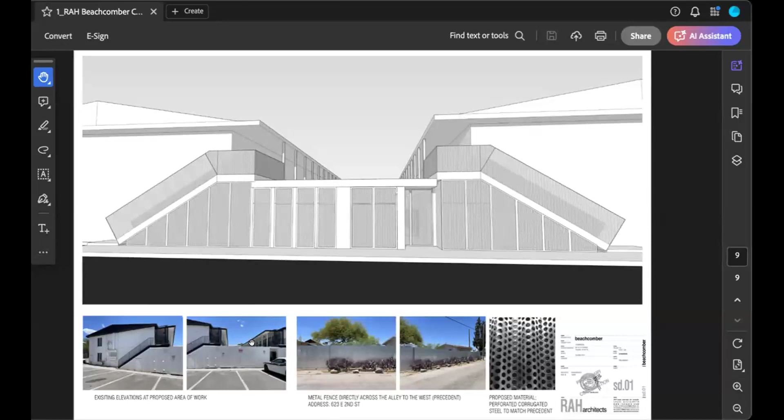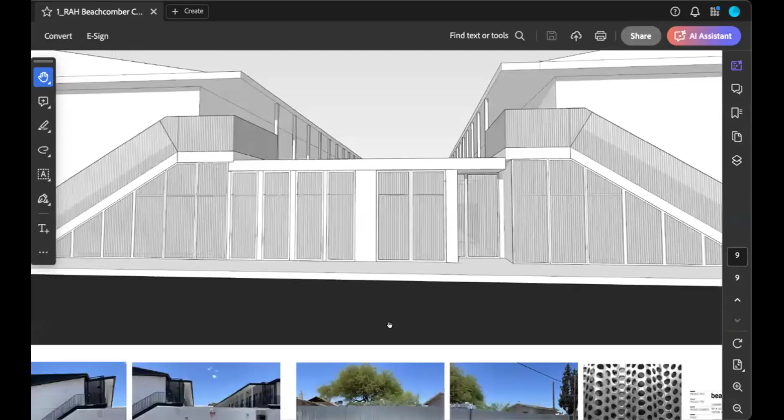So our idea was, in order to update the exterior rendering from where it is—here's a series of photos of what that looks like right now. It's T111 siding, with some battens on it and an open railing at the stairs. What we'd like to do is introduce a new material, and we're thinking corrugated steel, corrugated metal, as an application. That'll do a couple of things: one, we think it'll modernize the elevation, but two, in some circumstances it may allow for slight permeability into the pool.

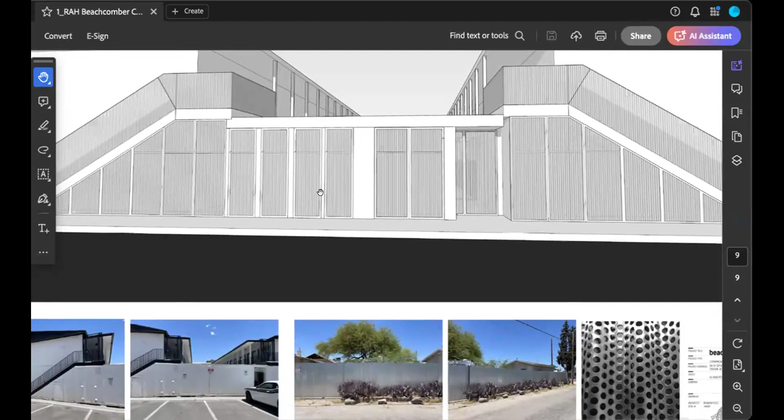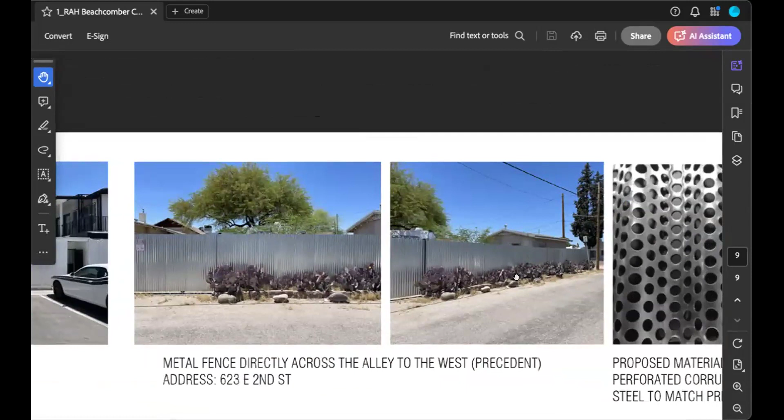As you can see, this is going to be the door dressed with that material that you can see into. It may also assist in venting some of the back areas of that laundromat. Long story short, the materiality is the main point we have in question, and we wanted to bring to your attention that there's theoretically a precedent set, which is across the street at our neighbor's property, where they're using a corrugated steel fencing.

I'll leave it at that. This is a courtesy review, correct? Yes. This is just my opinion, but I think our design guide allows corrugated steel, so I don't see any issue with it, personally.

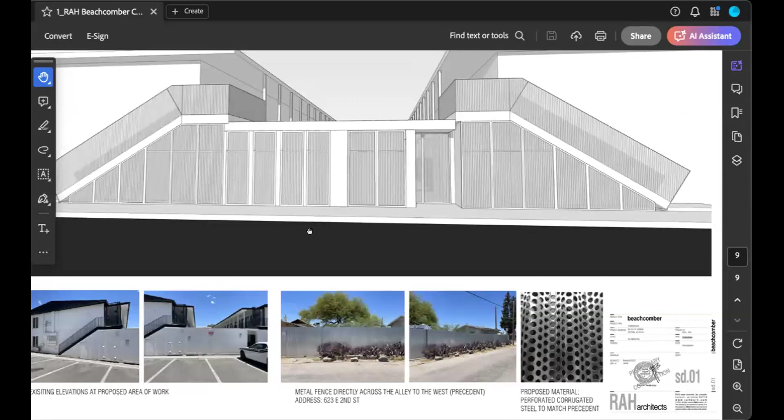So you're recommending a perforated corrugated—correct, we'll have the holes. And is that going to go up by the stairs and the new doorways, or just everything dressed in this material that has a striation would theoretically be this perforated corrugated. And will it be galvanized or ungalvanized? Is it going to stay shiny? Galvanized, it'll stay shiny. Exactly—attempting to mimic what's across the street.

Might some of it have an opaque material behind it so you can see through? We don't want to see the back of a washing machine. That's correct—because it's a conditioned space, we'll have to have some form of insulation in there. Maybe the underside of the door would be cut for ventilation, and that perforated metal might afford additional ventilation in one way or another. But you won't be able to see the washer box and the utility hookups and all that kind of stuff.

So which one of these would remain sort of transparent, if you will? Because you mentioned the pool door—would the handrail? Yes, so I'll start with what will be more opaque: essentially these six panels. Two are the pool equipment, which we don't want to see, and then these will be the laundry. And what we're proposing on the underside of the stairs will be perforated.

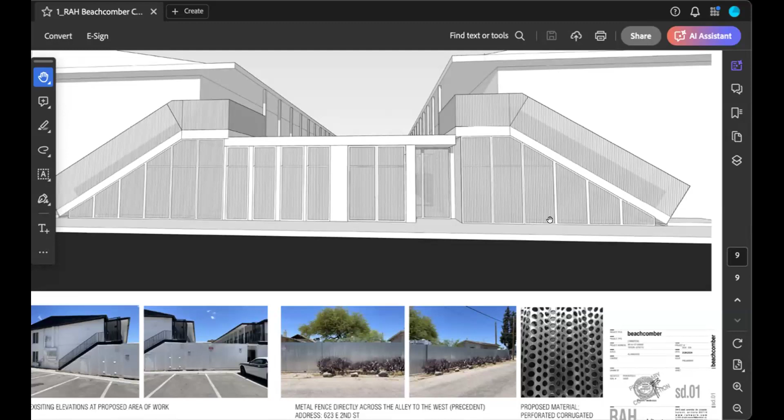What's happening under the stairs—is it just circulation? No, we haven't landed on that just yet, but at least on this side we're proposing we'll use that as some sort of utility space for HVAC. We need to provide an HVAC condensing unit for this enclosed space, so we're probably going to have a mini split sitting underneath there that needs to breathe. For the rest of the locations, we've been playing with the idea of lockable storage for bikes or any other scooter transportation element that the students might use.

So I'm going to scribble really quick to make sure I'm understanding. The idea is the only ones that will really be open, it's all gonna look sort of the same, but this is the only stuff that's open. The rest is gonna have some sort of solid behind the perforated metal. Correct, a backing, whether that's an actual Dens Glass material that's waterproof, or an insulation of some sort.

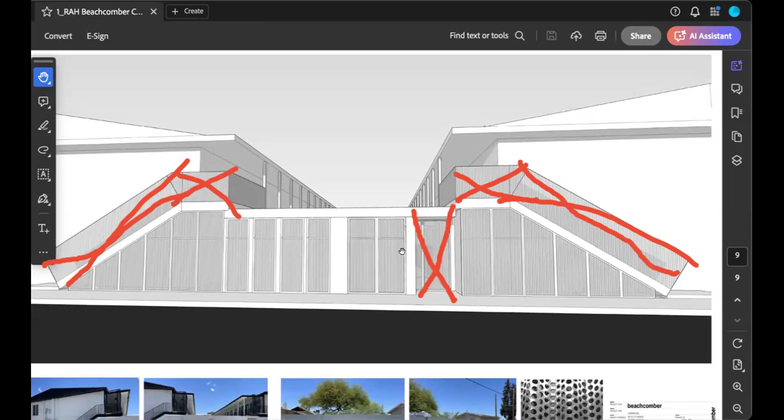Why not just use solid in the areas where you want it to be solid? I'm asking why not use unperforated corrugated? I mean, if I'm going to use this much, I might as well use a little bit more to continue the aesthetic quality of it. I think once you see this stuff and the light hits it, even with a backing to it, there's kind of a shadow nature to the way the perforation works, even with a backing that's, let's call it, 1 to 2 inches away from it.

And this is not a contributing property, right? It's not, I looked. Okay. I don't have a problem with it. I think it's a little bit outside of the normal corrugated that we look at, but I think it's interesting and it's not prohibited.

Yeah, and no pun intended, to be transparent, I don't know where the ownership is in terms of pricing, so we may be back presenting later on with a solid material, because perforated corrugated is way different than solid corrugated.

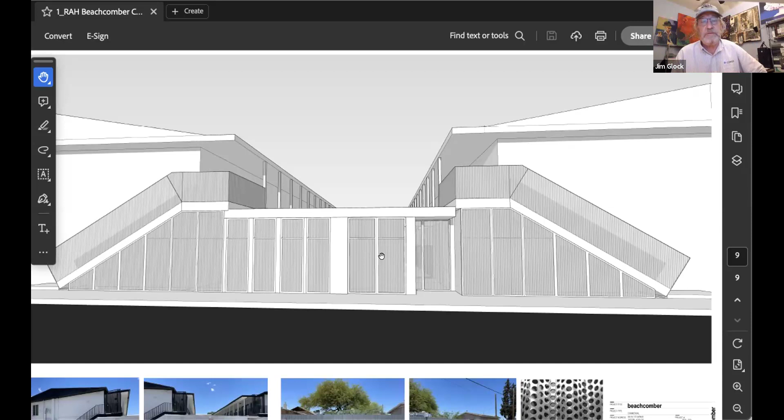So again, Rachel, Damon, so we either want one or the other. And if it's perforated and you actually want it to be solid, you'll do something behind it. But from the alley's perspective, our named alley, Jacobus, it would all be the perforated material. And in those cases where you didn't want people to see, you'd put something behind it that would prevent that. That's neither here nor there, what you choose to use. Correct, yep.

Great, this is 901 North First Ave, right? Yes. It was apparently originally called the Saratoga. Oh, rebranding effort pretty recently. Yeah. Sarah, did you have any comments? No, looks fine to me.

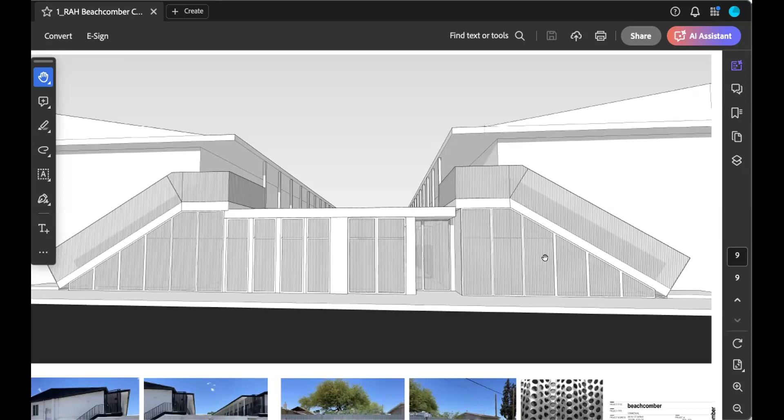And then just so I'm absolutely clear, again, it's the exterior qualities that you all are most concerned about. The interior is not something I need to present moving forward, we could just focus on exterior elevations, materiality, details, and all that. You need to present the interior courtyard area because it's still the exterior. Oh, okay, interesting. Do we need to look at that while we're here? They may not be overly concerned about it, but you should still present it and they should still make a recommendation on it. Okay, yeah, what in materials? Not a recommendation today because a recommendation today is not necessary, since it's a courtesy review.

So, while we're on this, in terms of materiality, we're thinking some sort of Trex faux wood system of slatting on this side here. This is that entry point we saw earlier, that's transparent. This would be a little bar area. The open shade structure kind of opens up near the perimeter of the roof eave, and then it goes to solid. And our interior designer started playing around with the idea of these pseudo living wall things that would dress the laundry facility and the backside of the pool equipment.

And I'm sorry, what did you say the pergola was? This would just, I mean, the pergola would probably just be an open steel structure, to be perfectly honest with you. At this point, that's my recommendation, but again, cost being cost, it may change to some sort of wood product that's treated or something like that.